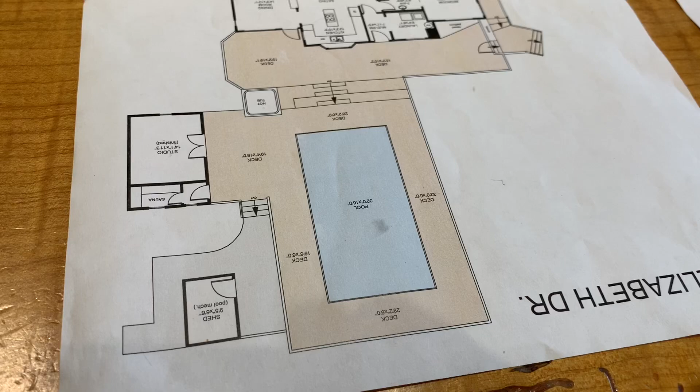Here is the area under consideration. You can see right now the pool, lots of deck all surrounding it, yoga room, pool room, hot tub, deck that we actually use up here, playroom, kitchen. Here's a closer version of that area, and you can see that it's quite a lot of square footage to actually rewood.

So the goals of this project with the latest plan are: number one, use less wood, blend into the background so when you look out you don't see wood. Number two, reconnect the house to nature. Right now there's barriers all around the edge that separate this area from the beautiful nature all around it, so we'd like to rewild.

The third goal is to save money. We really have to simplify, use less wood. A fourth goal could be fireproofing - you're not actually allowed to have dense trees and bush around your property.

You can see here how cut off this part of the land is from that part of the land. The house is completely separate. No matter which way you look, the backyard is dominated by decking and is completely separate from the landscape around it.

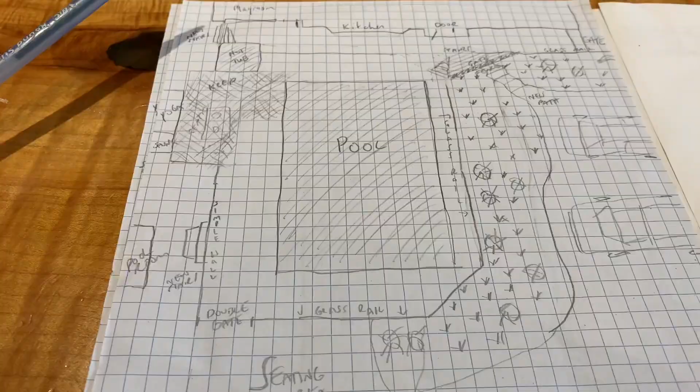Big idea number one: remove as much decking as possible. Easier said than done, but we can remove about half of this side on an angle here before there's a bunch of pipes under here. This area is harder to remove because there's a rock wall that meets up here, and there would be a gap if we removed it. This area is also hard to remove, although I feel we can dial this back a good 4 boards.

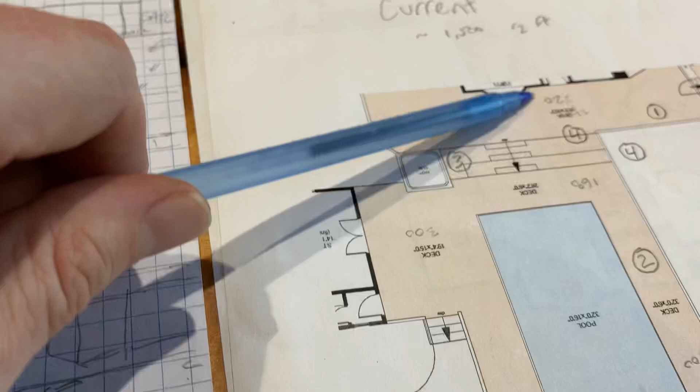Innovation number two: create some kind of new pathway that opens this land and the house and the front door up to nature. Currently out the kitchen and the door, all you see is deck and railings. In this way, you'd remove the railings by making it glass, lower the whole deck, make stairs and a new entrance off the parking lot.

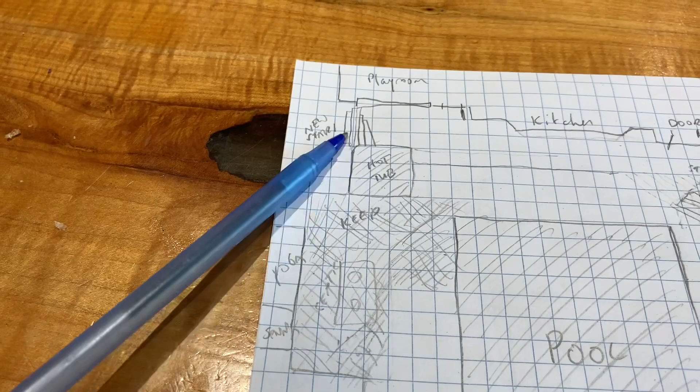So when you'd enter, you'd see this beautiful planted garden that's not overgrown and have a nice way up here, and we'd have to build some kind of step system here, which unfortunately won't save wood. Small savings here by opening this up and creating stairs to get down into the garden, but we'd probably only be able to cut that much.

The hot tub is on a cement pad, so it can't be moved. So those are really the 3 big ideas: less deck along here and here, and make this green and much more accessible, so when you're looking from the deck or from the house, you see a connected landscape rather than this high up separate pool area and deck, and then the far off nature.

We open up the view corridors, which means we get rid of a lot of the trees that are overgrown in here and make it nice, tidy, and small. We have this accessible area which opens up the view both from down up as well as from up to down and connects these 2 zones much better, as does the glass railing here.

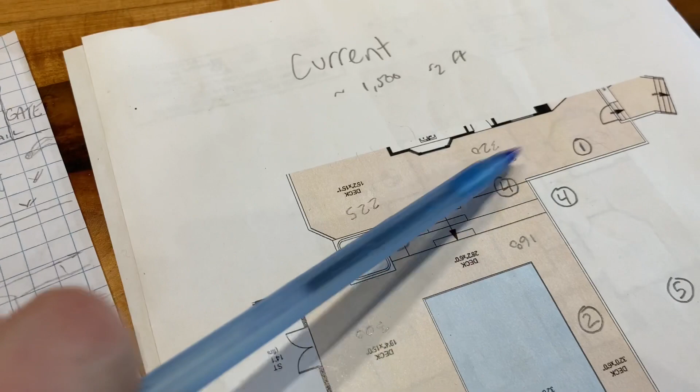Then we would have a ton of new wood to replace, sadly, a little bit less here. But this would be cut back from how deep that is here, cut along here, with the entranceway also cutting this amount of deck out somehow. A little bit tricky from an engineering perspective because the house is up so high, so the deck would be only like to there, and then we would have all this deck as well, a little bit less here.

Other idea, if we want to save money: Bob and I rebuilt this with pressure treated wood. You could, in theory - it's over the poop cap of our septic system - keep that, it's actually in pretty good shape, and only have to do the wood, the new Trex here, here, here, here, here. It's still a lot of Trex. I really wish we could get rid of more.

So having this area here become a nice walkway into the house, getting rid of all that and opening it all up. No more tree, and a nice entryway up. Don't even have to change that much. It's a fairly easy grade, and then some stairs.

With this area all open to seeing gardens, and that railing line being much more simple and thin, either wire or glass on its own, and all that brush along here being gone, then you actually connect this land together more. So the flow of the trees and the gorgeous rocks and moss out there kind of enters the garden rather than being these 2 separate zones. That's the idea.